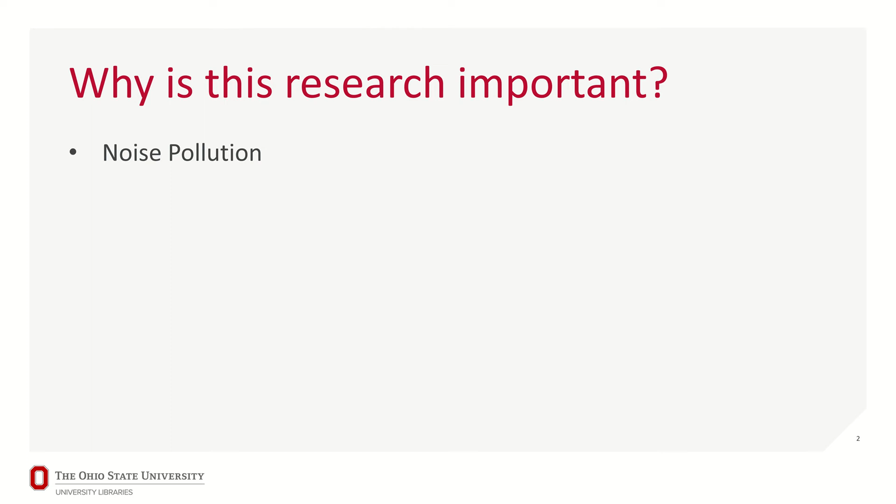The first is noise pollution. If you live in any big city, or if you've ever driven through a large metropolitan area, you'll know that aircraft are super loud. Over the past few decades, more and more noise restrictions have come into place just to protect the people around these large airports.

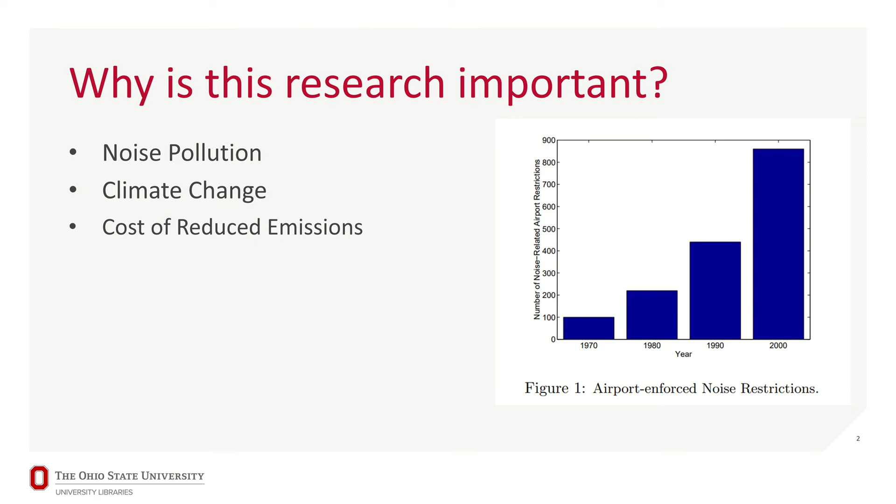Climate change is a huge thing right now, so reducing these aircraft emissions can have a huge impact on climate change. The cost of these reduced emissions is usually higher than the engine operating right now, which is why these emissions standards haven't been put into place. Those prices are going to get pushed onto consumers if they're enacted.

And the geopolitical climate is unstable, is the best word for it at the moment. Having access to alternative fuels, maybe electric aircraft, and all these techniques to lower emissions can hopefully stave off the instability formed by geopolitical issues happening across the world.

And then the future of what we're going to be working in is going to be affected by these emissions. Electric aircraft, more efficient engines, all sorts of things like this is where the future of our careers are probably going to be. Even if you're not directly in these fields, you're going to be affected by them.

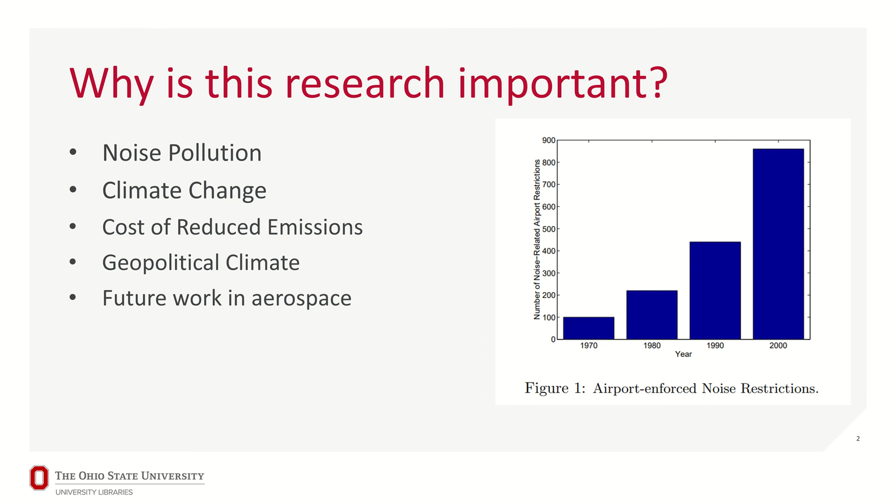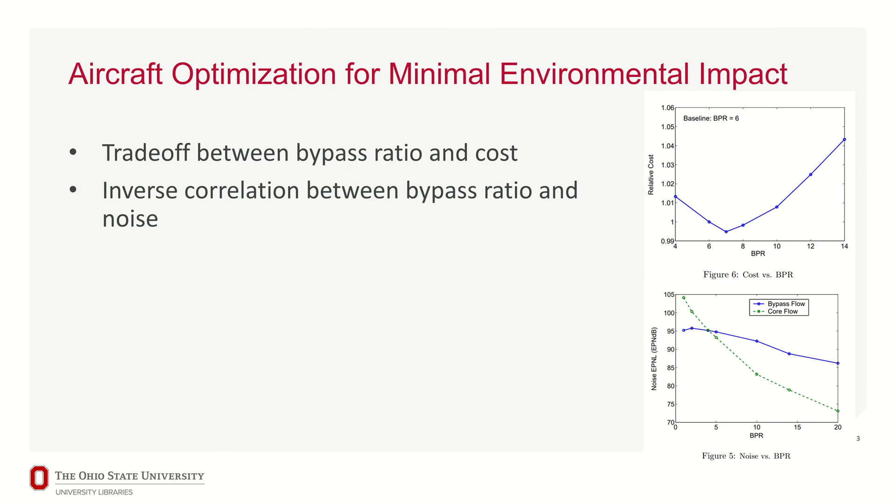And that bottom right one shows an inverse correlation between bypass ratio and noise, meaning that indefinitely increasing the bypass ratio is going to reduce your noise level. But there's a sweet spot there between the cost to the airline and increasing your bypass ratio, so your engine stays effective.

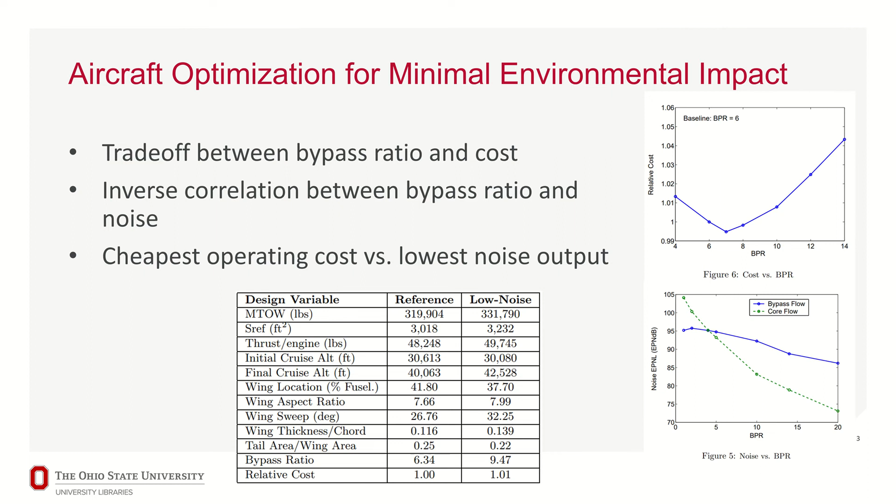The study looked at cheap operating cost versus low noise output between two aircraft designs, and they found that the lower noise version was only about 1% more relative cost, meaning this is technically a viable thing airliners could put into place, but obviously they're not going to without some sort of regulation pushing them to.

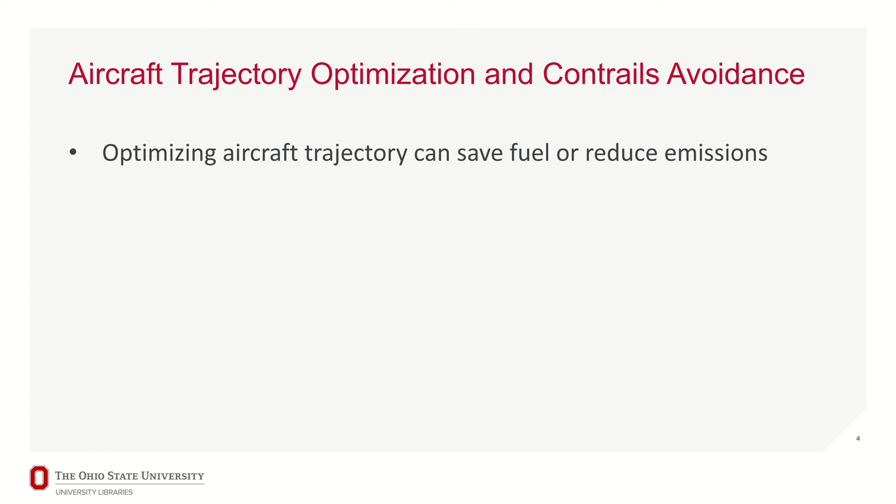The second study was aircraft trajectory optimization for contrail avoidance. They found that optimizing the aircraft's flight path can save fuel or reduce emissions significantly, and there are indications that persistent contrail formation can lead to adverse climate change.

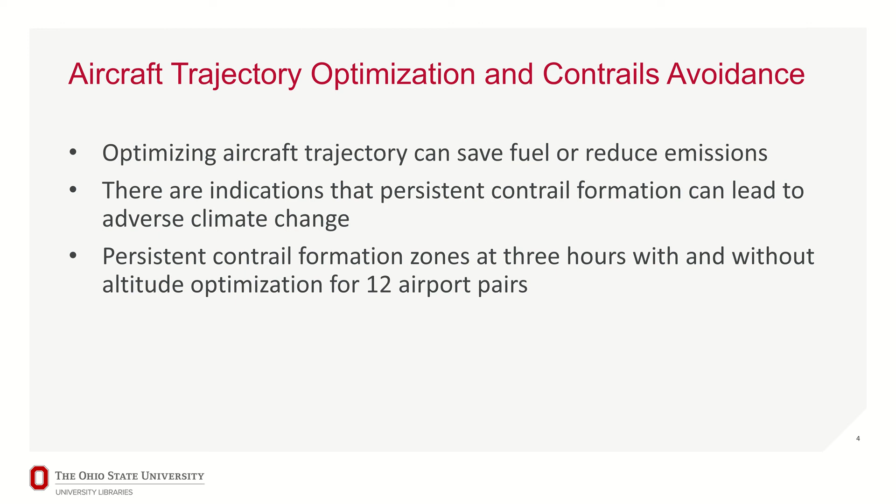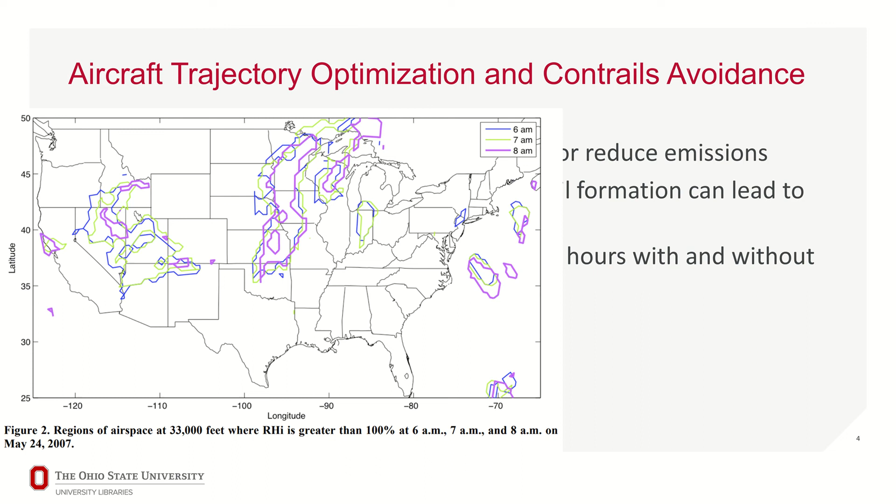On this chart, the colored blobs are at 33,000 feet, where essentially in that zone, if the aircraft flies through it, there's almost 100% chance of contrails forming persistently, just constant. These are the 12 airport pairs they looked at, with a visualization of flights passing through some of those zones.

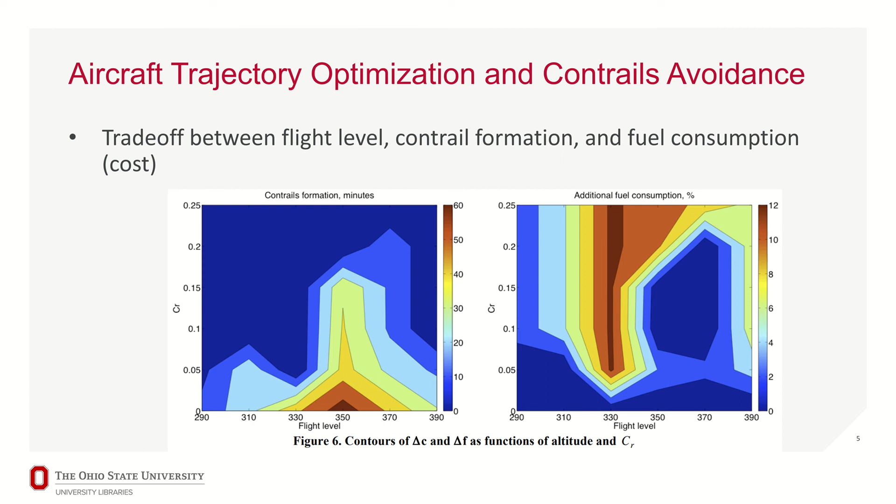The results showed a trade-off between flight level, contrail formation, and fuel consumption. If you overlaid these two plots on each other, you'd see that higher fuel consumption means less contrail formation because you can avoid these pockets. But there's a sweet spot somewhere in there, because you don't want to consume a ton of fuel to avoid these, but you also don't want to just fly straight through these pockets.

Here we see three separate sample flight paths for one pair of airports. You can avoid all these pockets altogether, skim part of them, or fly straight through on the most optimized path.

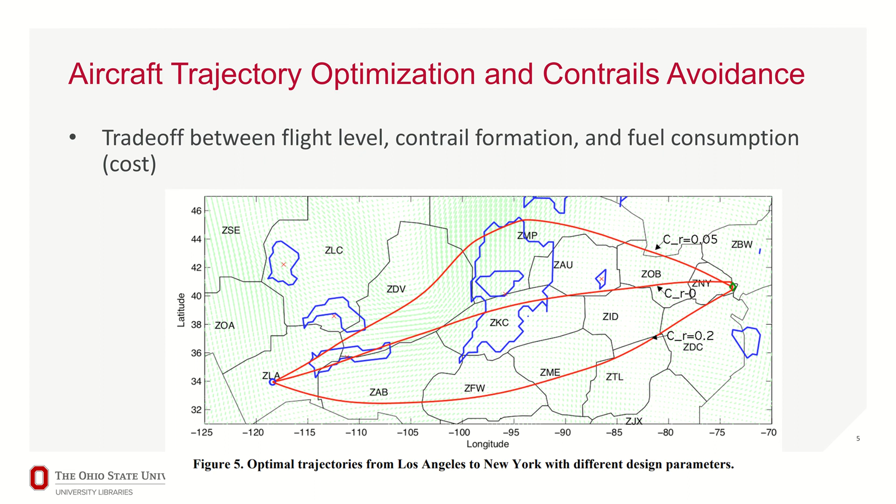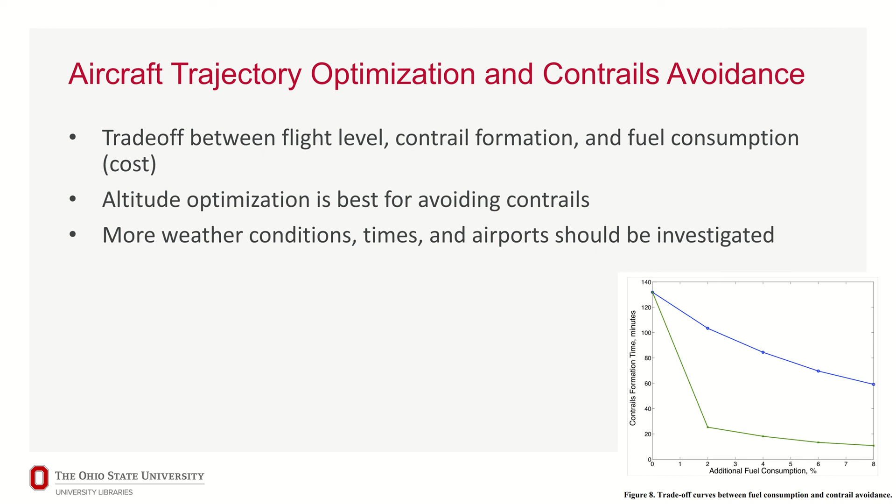They found that altitude optimization is best for avoiding contrails, just avoiding these altitudes altogether. The blue line shows without altitude optimization, and the green line is with. You can see that even with 2% additional fuel consumption, if you optimize for altitude, you can significantly avoid forming these contrails. They only looked at certain conditions like weather, times, and airports, but said this is significant enough that it should be expanded to more of those.

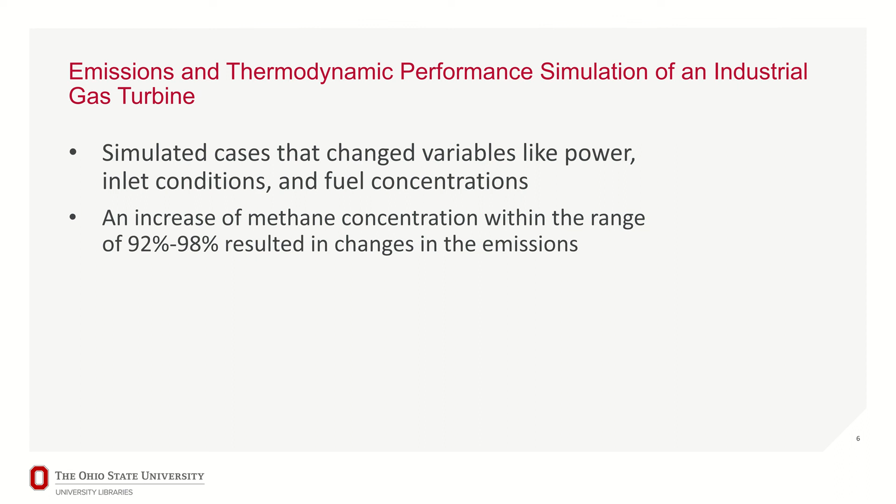The third study is emissions and thermodynamic performance simulation of an industrial gas turbine. They simulated variables like power, inlet conditions, and fuel concentrations, and found that methane concentration increasing from 92 to 98 resulted in significant increases in emissions. The first being that carbon monoxide was increasing from 0.14 to 0.19 parts per million at the combustor exit, and the second being that nitrogen monoxide was increasing too.

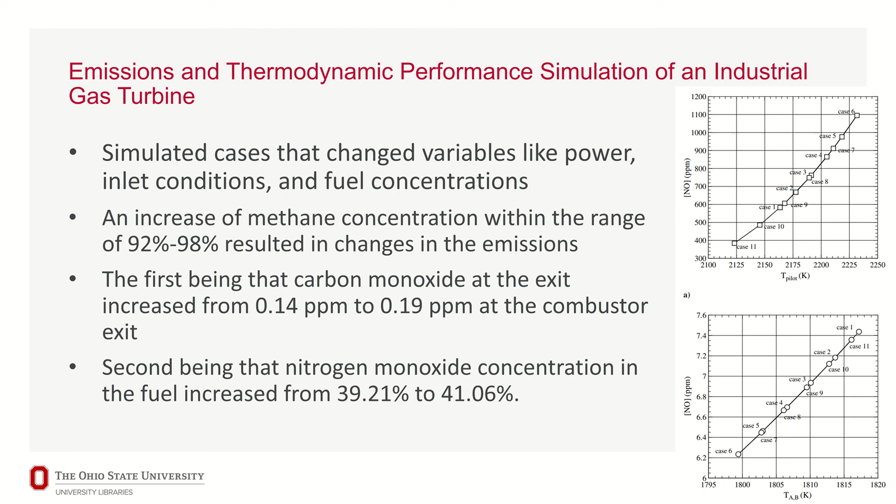As we can see on the right, as temperature increased across all their simulated cases, higher temperature just means higher emissions. That's consistent with the first study, which found that a higher bypass ratio means less flow going through the combustor and core of the engine, which means less temperature overall.

The fourth study was combustion emissions characteristics of a turbine engine fueled with HEFA blends. HEFA blends are hydroprocessed esters and fatty acid fuels, so used cooking oils, camelina feedstock - stuff with the essential components that fuel needs, just a little bit different. They found that the thrust was the same across these two.

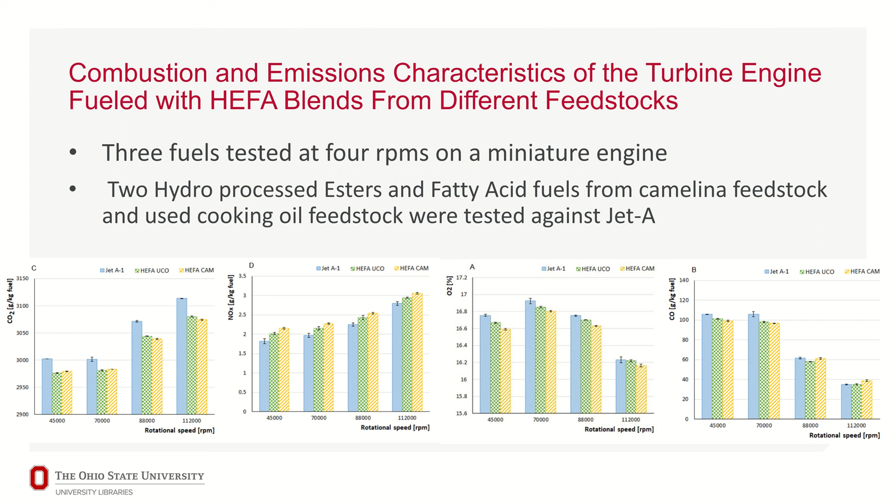These are the emission results. As you can see on the far left, CO2 went down significantly, on the order of like 40 to 50 at each RPM. Nitrogen oxides did go up for both of them, but as you can see, the magnitude is like 0.2 to 0.3, not super significant. O2 and carbon monoxide were down as well, but those aren't as relevant to emissions as the other two.

The last study looked at the trade-off between the climate impact of aviation, carbon dioxide emissions, and contrails - essentially looking at how contrails affected aviation emissions. This study didn't optimize for altitude like the other one did. They found that optimizing for altitude means you're flying these engines at altitudes they're not used to, and their performance would suffer because of it.

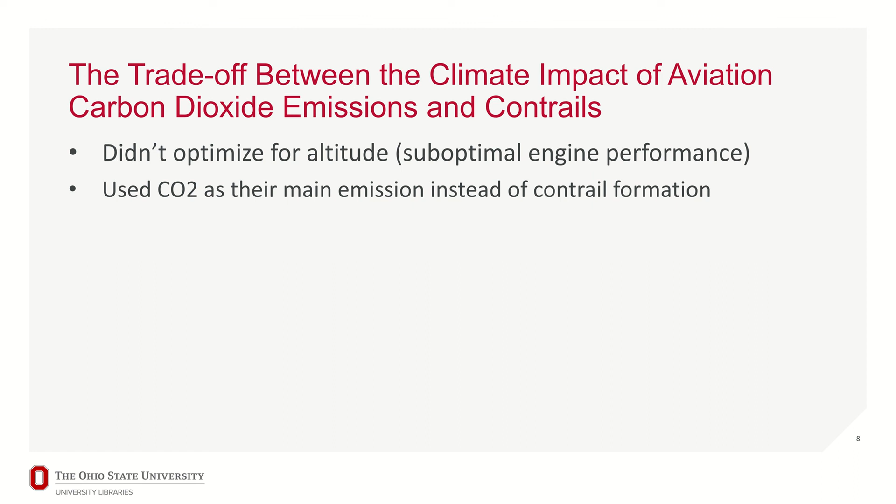They still looked at contrail formation, but used CO2 as their main standard for testing all of their emissions, just because they found it to be more consistent than saying, hey, 20 minutes of contrails is going to do this to the climate - it's a little harder to predict than CO2. They looked at time horizons of 20, 50, and 100 years and its effect on the climate, saying, like, hey, we have this engine burning at this rate - how's it going to affect the environment if we keep burning it at that rate for these time horizons?

They found that adding 100 kilometers of distance to a flight to avoid making a contrail is beneficial for climate change, but again, comes down to cost for the airlines to do this.

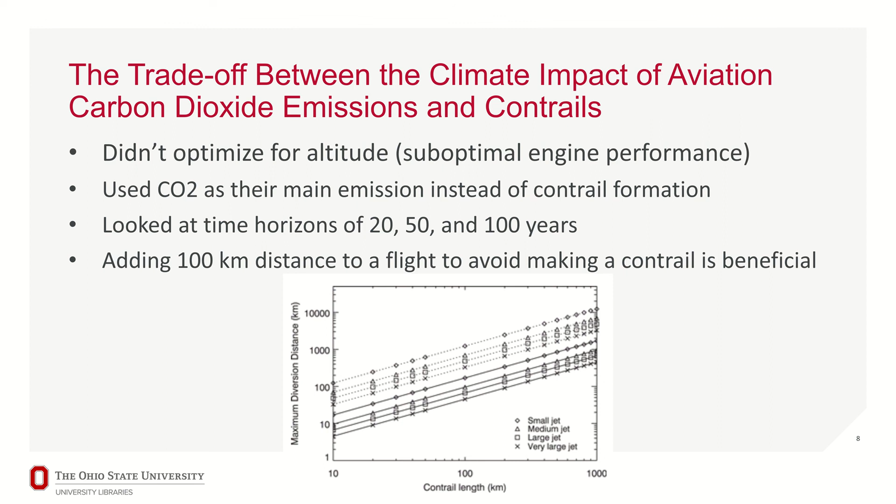So to summarize: bypass ratio can reduce noise and gas emissions. Avoiding certain pockets of air can be beneficial to emissions. Lower combustion temperatures mean less emissions in general. Alternative jet fuels are readily available that provide similar thrust - they just need to be integrated correctly into the engine, built around the engine. And adding flight distance to avoid contrails reduces emissions significantly.

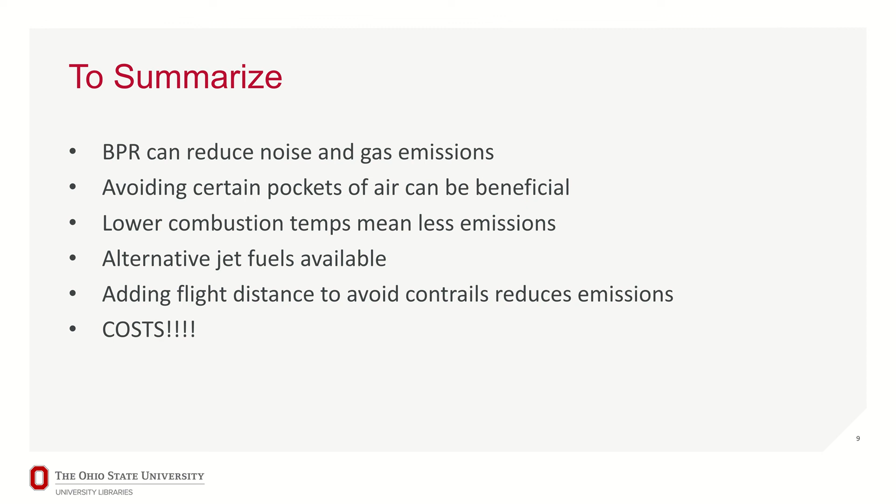The biggest thing here to note is cost. If it's not cost effective to the airline, they're not going to do it. That's why these things aren't in place right now. An airline's not going to increase their operating cost by 1, 2, 3, 4, 5% just because it emits less, unless there's some sort of subsidy or regulation that's going to force them to do this.